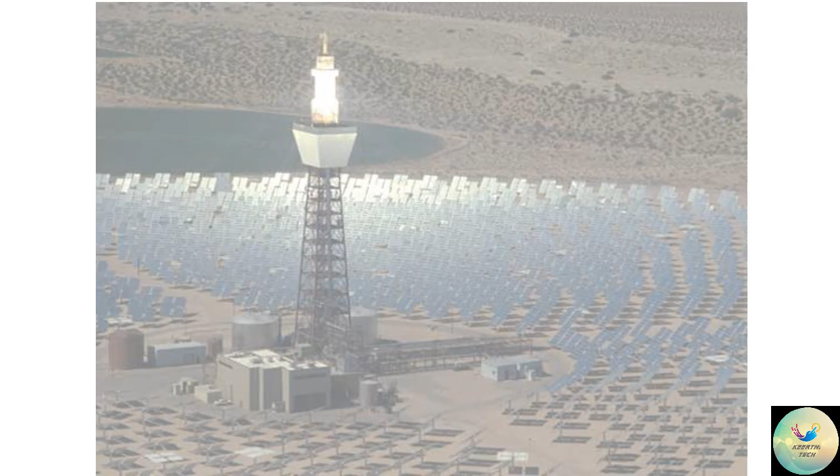Solar Power Tower. Explanation of Solar Power Tower. The Solar Power Tower, also known as central tower power plants, heliostat power plants or power towers, is a type of solar furnace using a tower to receive the focused sunlight. It uses an array of flat, movable mirrors to focus the sun's rays upon a collector tower.

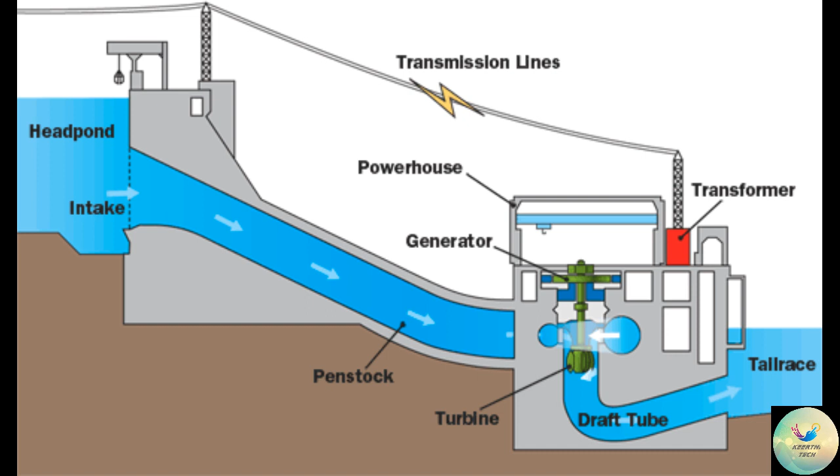Classification of Solar Power Tower. First-generation technologies are most competitive in locations with abundant resources. Their future depends on exploitation of available resource potential, particularly in developing countries, and on overcoming challenges related to environment and social acceptance. Example: hydroelectric plants, geothermal power plants, and biomass briquettes.

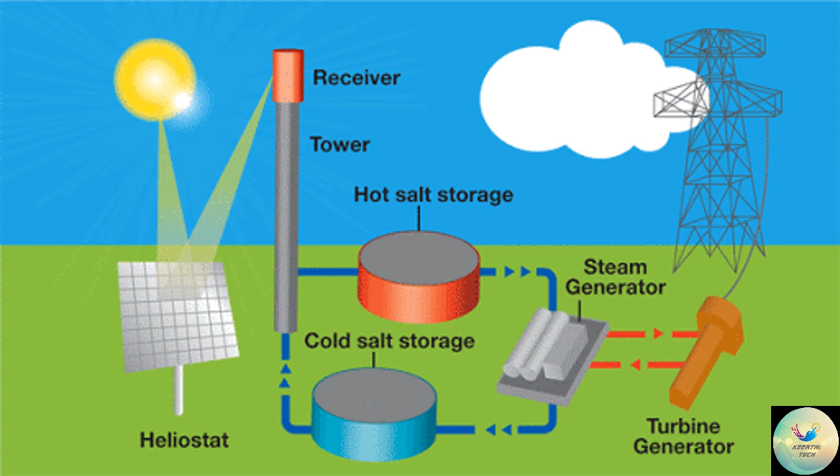Second-generation technologies are said to be the future of power generation and are fast catching up, but the market for these sources is limited to only a few countries. Example: solar heating systems, use of ethanol, etc. Third-generation technologies are not yet widely demonstrated or commercialized. They are on the horizon and may have potential comparable to other renewable energy technologies, but still depend on attracting sufficient attention and R&D funding.

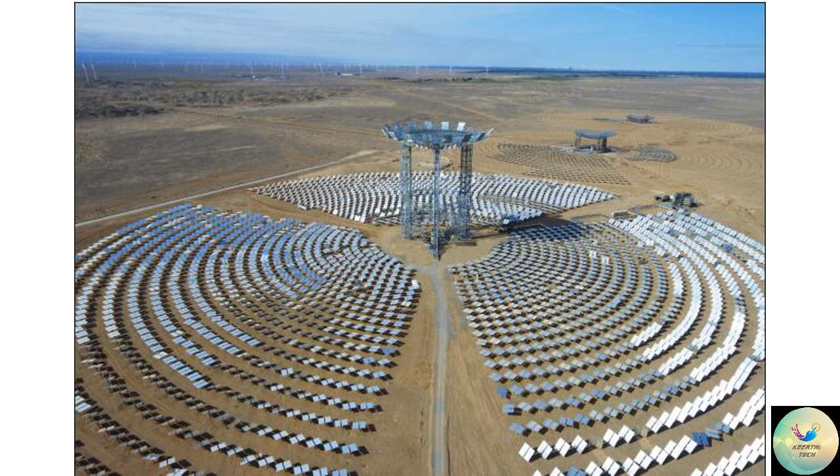Solar Power Towers. Solar Tower. Solar power towers, also known as concentrated solar power, CSP, towers generate electric power from sunlight by focusing concentrated solar radiation on tower-mounted heat exchangers. The system uses hundreds to thousands of sun-tracking mirrors, called heliostats, to reflect the incident sunlight onto the receiver. These plants are best suited for utility-scale applications in the 30 to 400 MW range.

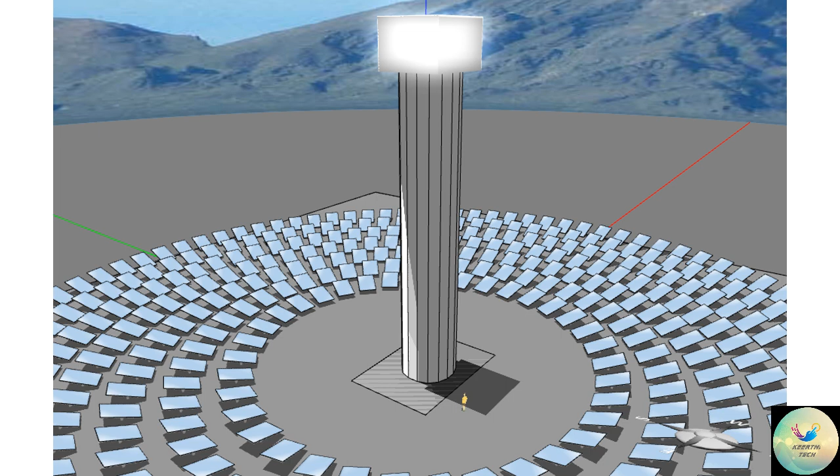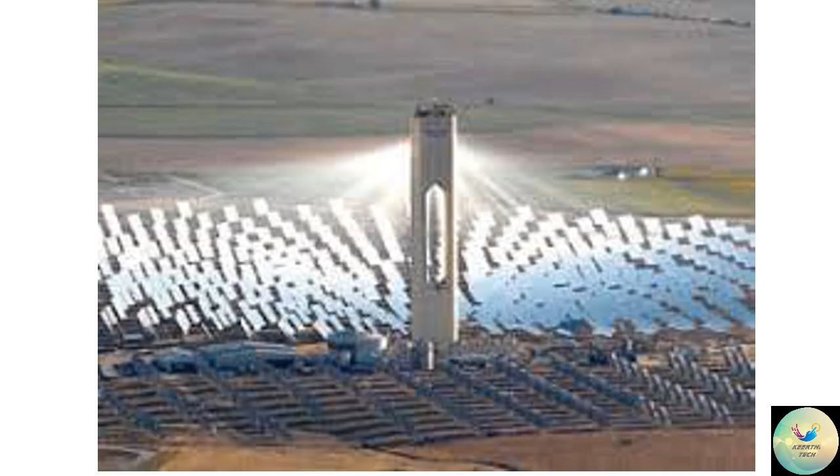The limited supply of fossil hydrocarbon resources and the negative impact of CO2 emissions on the global environment dictate the increasing usage of renewable energy sources. Concentrated solar power, CSP, is the most likely candidate for providing the majority of this renewable energy, because it is amongst the most cost-effective renewable electricity technologies, and because its supply is not restricted if the energy generated is transported from the world's solar belt to the population centers.

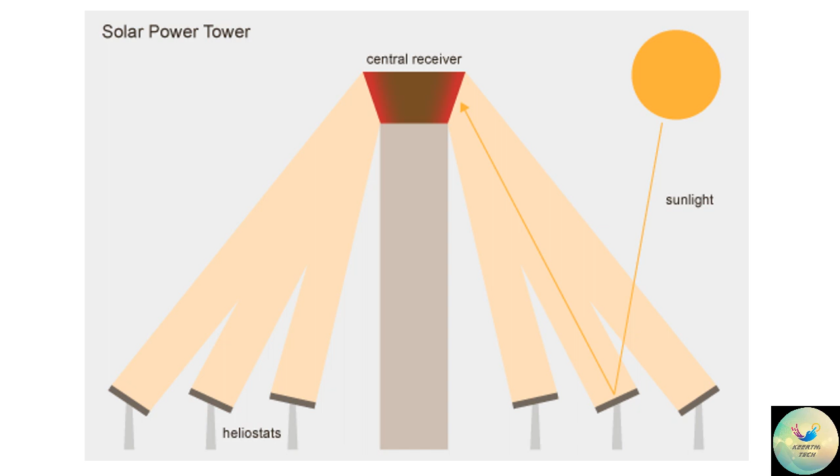This energy is then passed either to the storage or to power conversion systems, which convert the thermal energy into electricity. Power tower systems usually achieve concentration ratios of 300 to 1500, and can operate at temperatures up to 1500 °C.

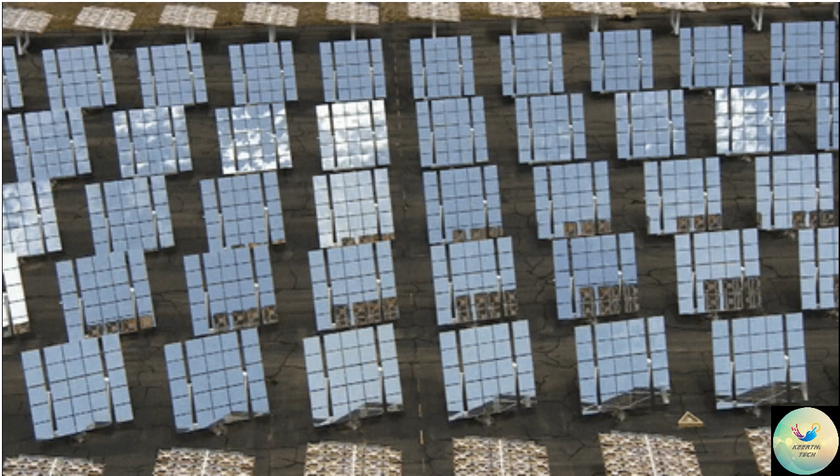Heliostats. Heliostats are reflective surfaces or mirrors which track the sun's rays and reflect them onto the central receiver. Relatively few heliostats have been manufactured to date, and their cost is high. As the demand for solar power increases, heliostat mass production methods will be developed that will significantly reduce their cost. Prices are a strong function of annual production rate.

Solar power towers. Since the heliostat field represents the largest single capital investment in a power tower plant, advancements in technology are needed to improve the ability to manufacture, reduce costs, and increase the service life of heliostats. In particular, a lower-cost azimuth drive system is needed.

Central receiver. Central receiver, or power tower, systems use a field of distributed mirrors, heliostats, that individually track the sun and focus the sunlight on the top of a tower. By concentrating the sunlight 600 to 1000 times, they achieve temperatures from 800 degrees Celsius to well over 1000 degrees Celsius. The central receiver is also called a high-tech heat exchanger, which sits atop a tower.

The central receiver heats molten salt at around 290 degrees Celsius, pumped from a cold storage tank, to 565 degrees Celsius, where it flows to a hot tank for storage. When the grid load dispatcher decides electricity is needed from the plant, hot salt is pumped to a steam generating system that produces superheated steam for a turbine/generator. The salt then is returned to the cold tank, where it is stored and eventually reheated in the receiver to complete the cycle. Smaller, simpler receivers are needed to improve efficiency and reduce maintenance.

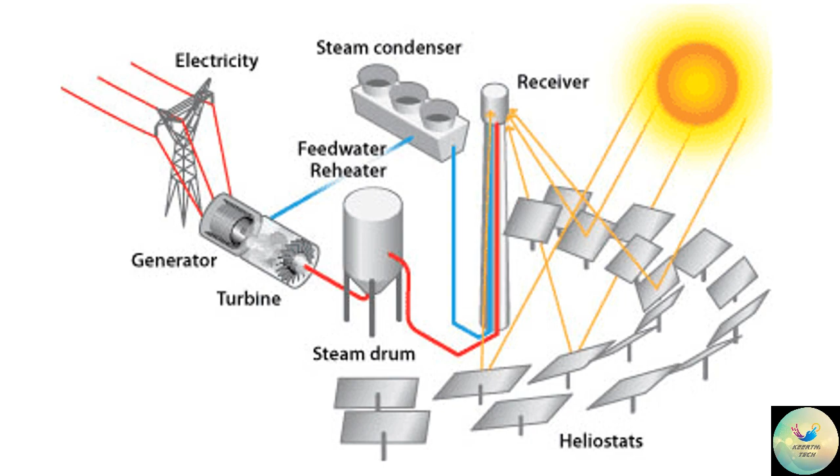Molten salt storage system. Molten nitrate salt, though an excellent thermal storage medium, can be a troublesome fluid to deal with because of its relatively high freezing point, 220 °C/428 °F. To keep the salt molten, a fairly complex heat trace system must be employed. Heat tracing is composed of electric wires attached to the outside surface of pipes. Pipes are kept warm by way of resistance heating.

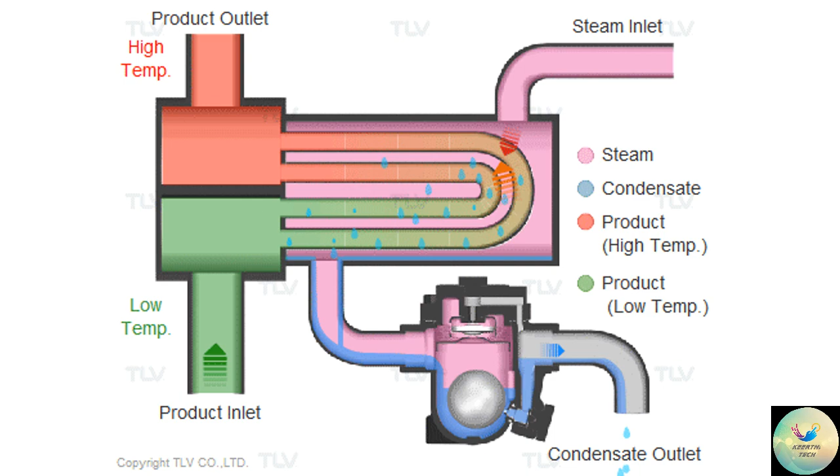Problems were experienced during the startup of Solar 2 due to the improper installation of the heat trace. Though this problem has been addressed and corrected, research is needed to reduce the reliance on heat tracing in the plant. Steam generator or turbines.

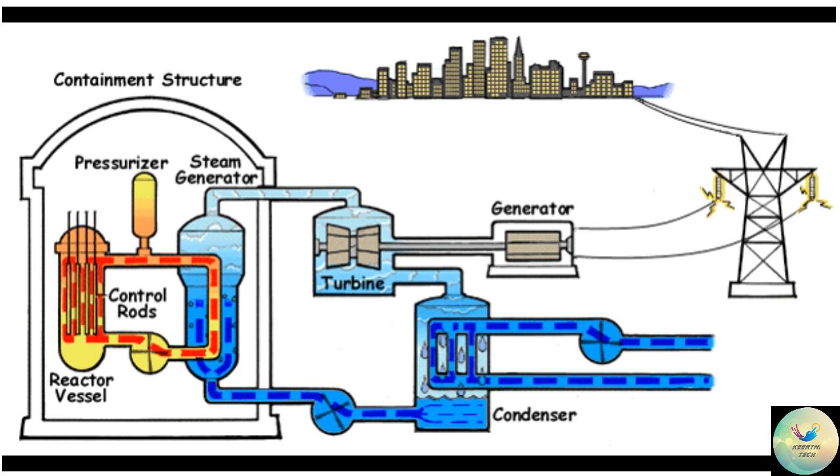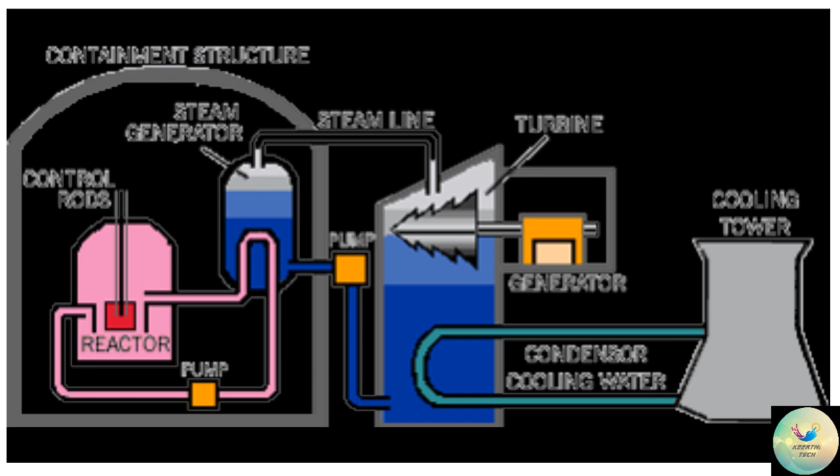The steam generator design selected for the Solar 2 project is completely different than the prototype tested at Sandia Laboratories during the technology development activity of the 1980s for Solar 1 because of the change in heat transfer fluid. The recirculating drum type system tested at Sandia performed well. However, at Solar 2, a kettle boiler design was selected in an attempt to reduce cost.

Significant problems have been encountered with this new system during the startup phase at Solar 2, requiring a redesign in many areas. Depending on the success of implementing the design changes, it was considered appropriate to re-evaluate the optimum steam generator design before proceeding to the first commercial plant.

Solar Power Tower working countries: 1. United States. 2. Germany. 3. Turkey. 4. South Africa. 5. Israel. 6. Spain.